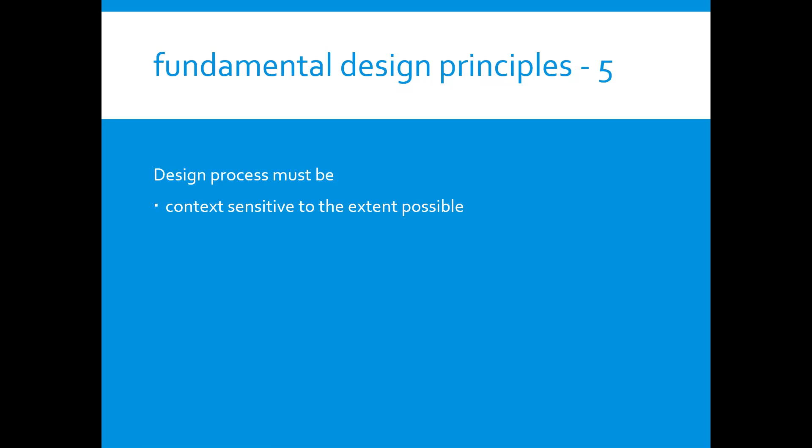Fundamental principle number 5: the design process must be context sensitive to the extent possible and financially sustainable at both program and project level. The geometric design process needs a more robust set of context definers, and the design process should support or direct design decisions, dimensions, and choices consistent with the defined context.

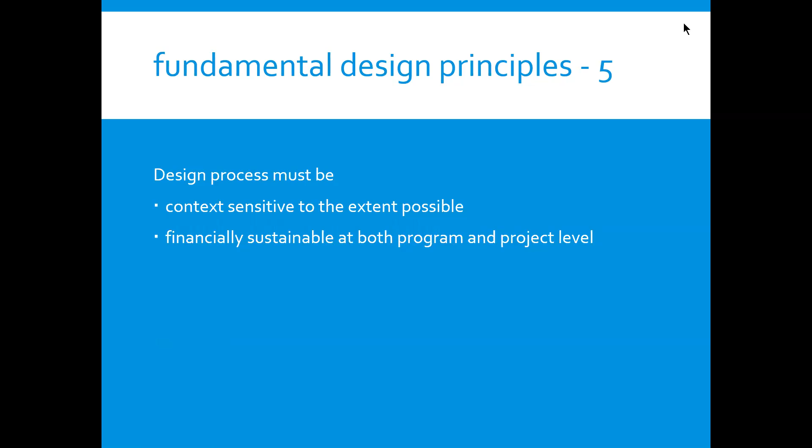The 21st century has been the continuation of trends earlier established and the emergence of new challenges. The continuation of fuel efficiency placed more permanent limitations on funding for road improvements. Aging infrastructure became the primary problem facing the various road agencies.

Therefore, it was apparent that a new approach should be developed, and in particular, new alternative design concepts should be established. The various Departments of Transport and the road agencies came under considerable pressure to expand their programs to explicitly include pedestrian and bicycle infrastructure.

The Austroads guidelines are fundamentally a collection of quantitative geometric design criteria and qualitative design guidance that does not present any particular design process. In the current geometric design process, the operational and particular safety effects of geometric design principles were poorly understood.

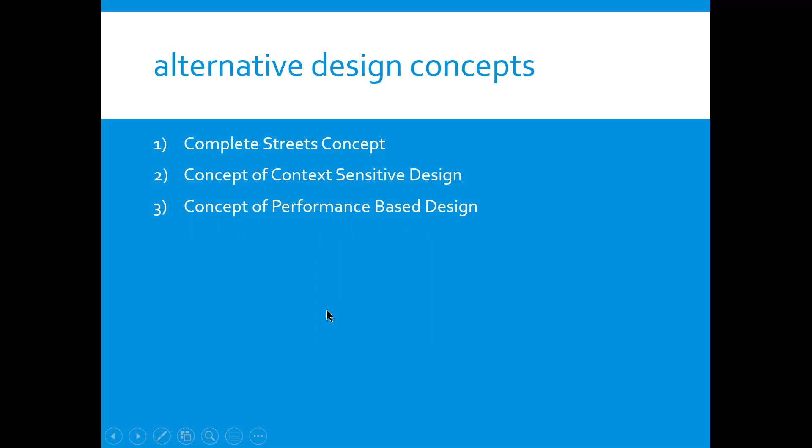Fourth, the concept of practical design. Fifth, the design matrix approach. Sixth, the safe systems approach. Seventh, the concept of travel time reliability. And eighth, the concept of value engineering.

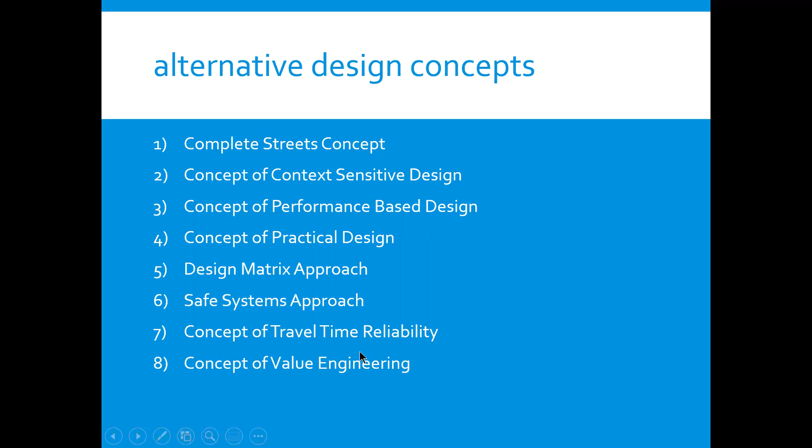So what is this complete street concept approach? It focuses on creating a roadway and related infrastructure that provides safe travel for all users. The goal is to consider all transportation modes in the design of urban roads, including bicycle and pedestrian needs. The complete street concept considers all transportation modes and all travelers.

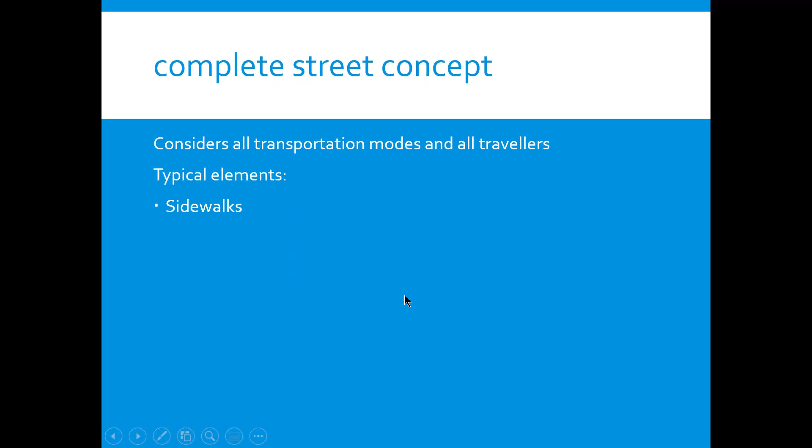Typical elements: sidewalks, bicycle lanes, shared-use paths, designated bus lanes, safe and accessible transit stops, and frequent and safe crossings for pedestrians.

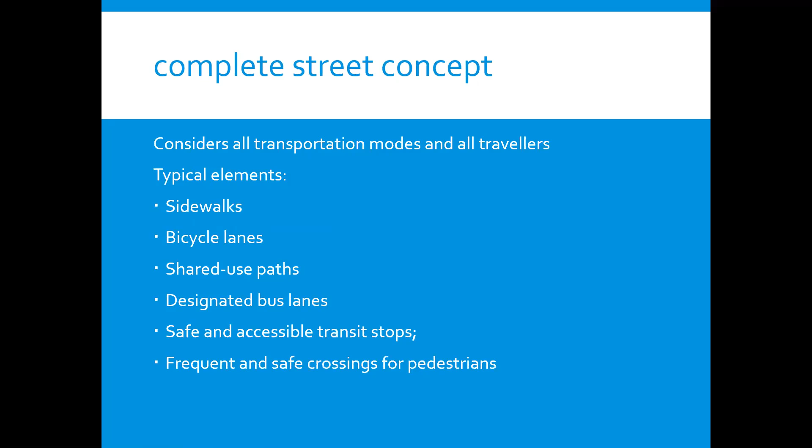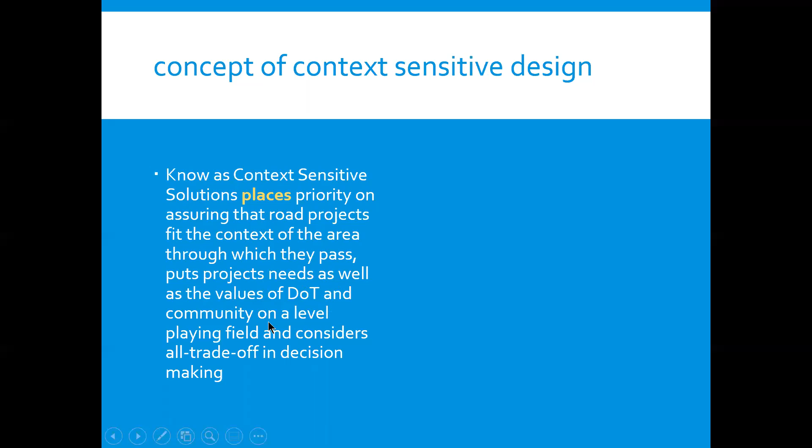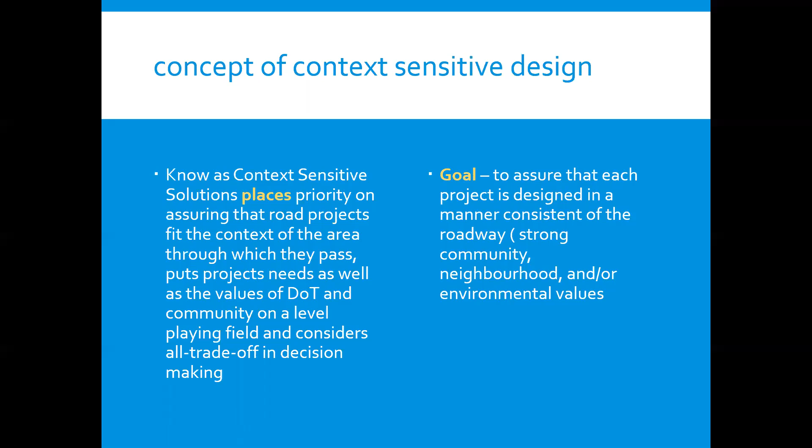The concept of context-sensitive design, known as context-sensitive solutions, places priority on assuring that road projects fit the context of the area through which they pass, puts project needs as well as the values of the Department of Transport or road agency and community on a level playing field, and considers all trade-offs in decision-making. The goal: to ensure that each project is designed in a manner consistent with roadway, community, neighborhood, and environmental values.

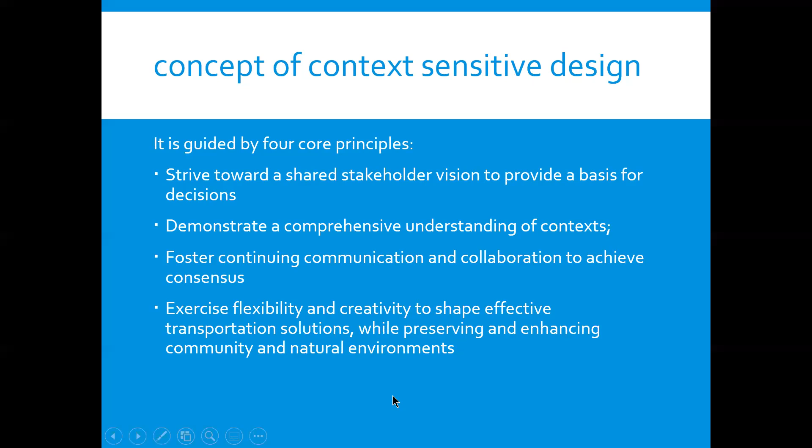The concept of context-sensitive design is guided by 4 core principles. Strive towards a shared stakeholder vision to provide a basis for the decision. Demonstrate a comprehensive understanding of the context. Foster continuing communication and collaboration to achieve consensus. Exercise flexibility and creativity to shape effective transportation solutions while preserving and enhancing community and natural environment.

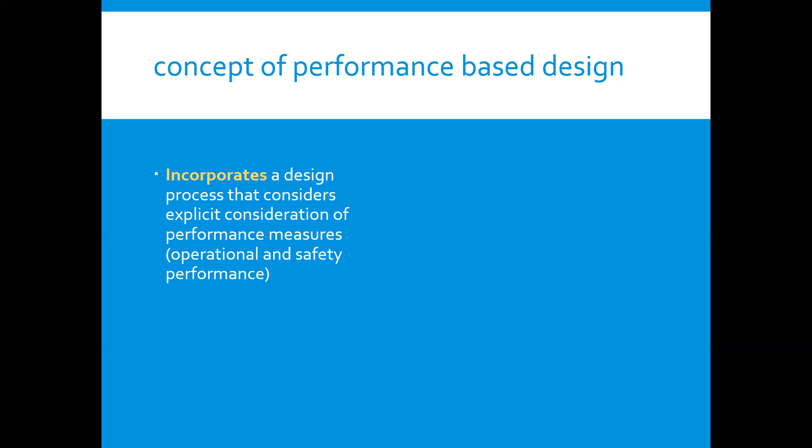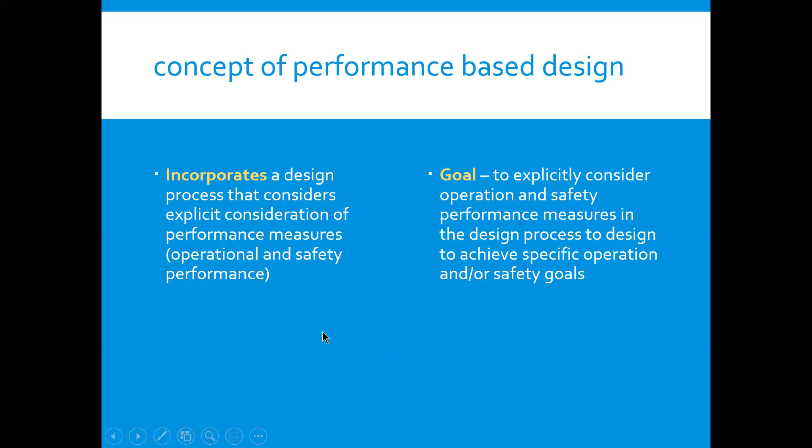The concept of performance-based design incorporates a design process that includes explicit consideration of performance measures, operational and safety performance. The goal: to explicitly consider operational and safety performance measures in the design process to achieve specific operational and/or safety goals.

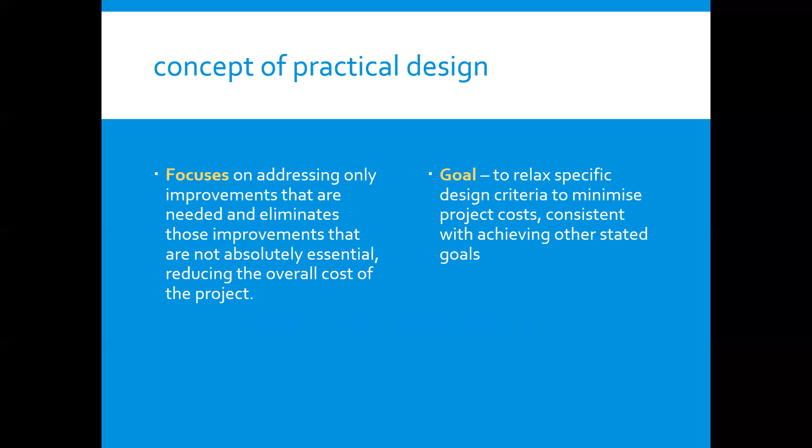The concept of practical design focuses on addressing only improvements that are needed and eliminates those improvements that are not absolutely essential, reducing the overall cost of the project. Goal: to relax specific design criteria to minimize project cost, consistent with achieving other stated goals.

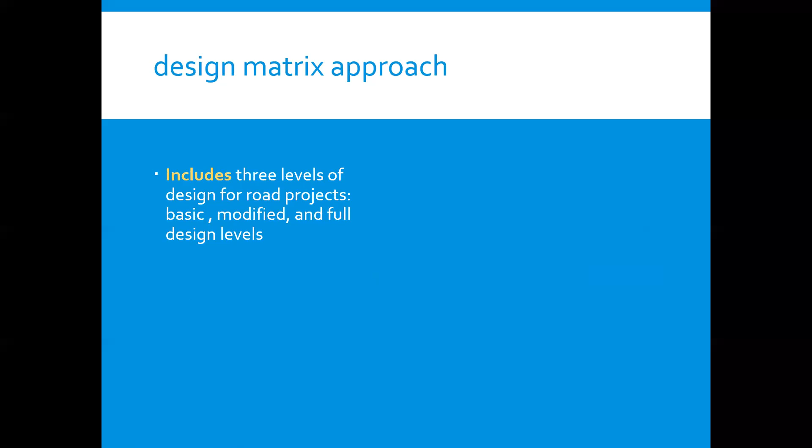The design matrix approach includes 3 levels of design for road projects: basic, modified, and full level. Goals: to achieve a required level of accuracy in the design details and overall construction cost.

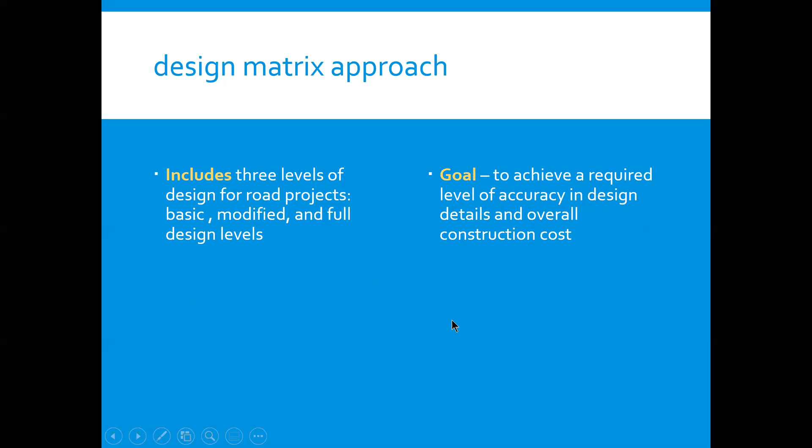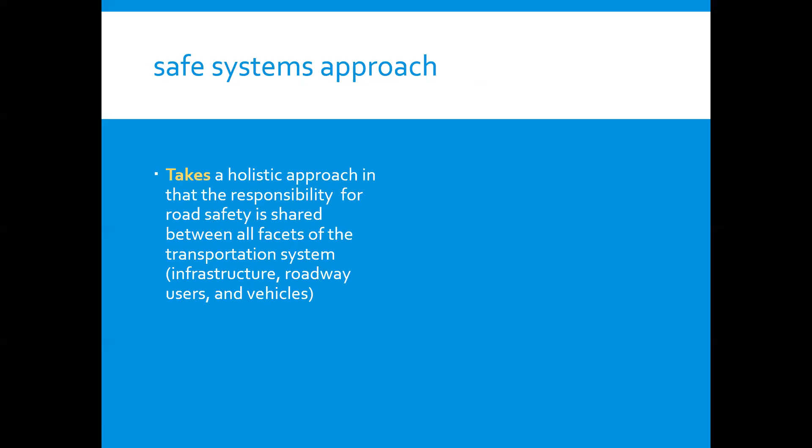Safe systems design takes a holistic approach in that the responsibility for road safety is shared between all facets of the transportation system: infrastructure, roadway users, and the vehicles. Goals: to design each project so that motorists will choose to travel at a speed that the designers consider appropriate to the crash risks present on the roadway.